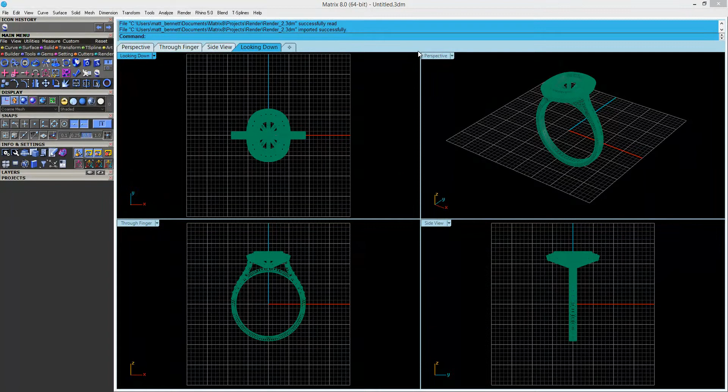Okay, in this video we're going to talk a little about the 3D printing tools in Matrix 8. To start off, we're going to take a look at this file here. It's already been converted into a mesh by our mesh repair utility, and you can find that in another video. But for now, we are going to take this ring and look at it to see where it might need some supports.

So what I'm going to do is open the 3D printing tools, and the very first button here says show support regions. If I click that, you can see in the command line I have the option to add an object. So I'm going to click add object, then click my ring, and press enter, and now you can see the ring turns kind of a gray color.

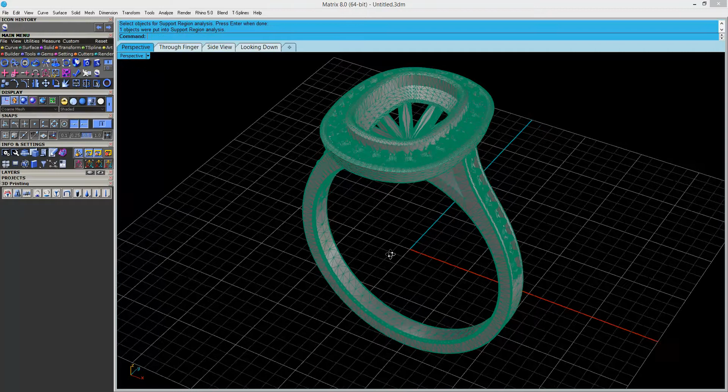So I like to switch over to the machine shade mode just to get rid of all the wires and edges of the mesh. In looking at this, if I flip it and look from underneath, you can see that some areas are marked in red.

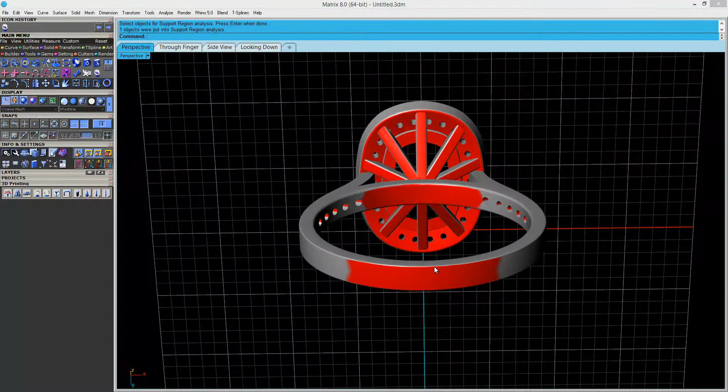Now these are areas that may need supports, okay, and that red area is determined by this degree that you set. So depending on the material and the machine that you're using, this angle may change. 35 works pretty good for most stuff, so we're going to leave it there.

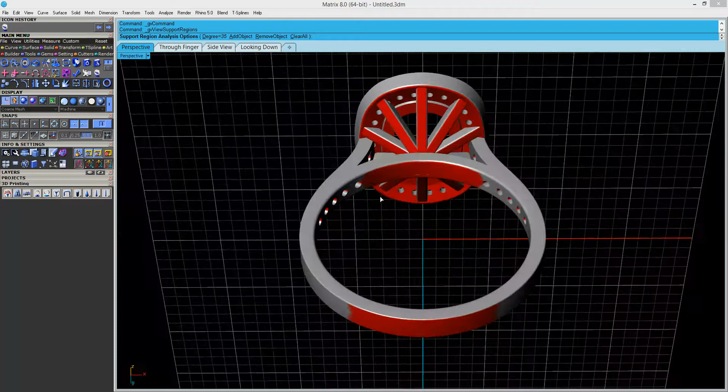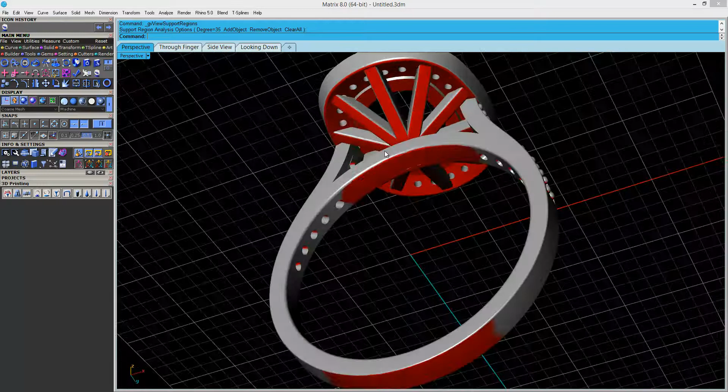So if we take a look at this, you can see all the stuff that is facing downward kind of gets painted with red, and this is just a suggestion. It's not saying you absolutely need support, or maybe the gray areas you absolutely don't need support, but it's just a guideline. So if I look in here, for instance, some of these small areas where it just barely got some of the prongs, you probably don't need support on these areas until you get down in here where you can definitely see there's a lot more red.

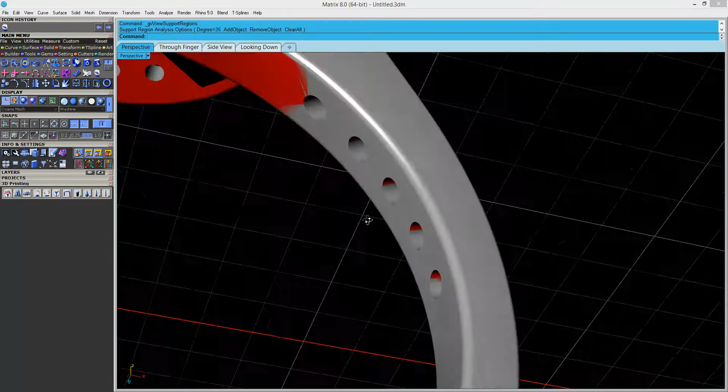Also inside the little holes here, that's probably going to be self-supporting, so we don't need supports there. The areas we're concerned with are really in the bottom of the ring, inside the ring rail here, and then of course these supports underneath the halo and the bottom of the halo itself.

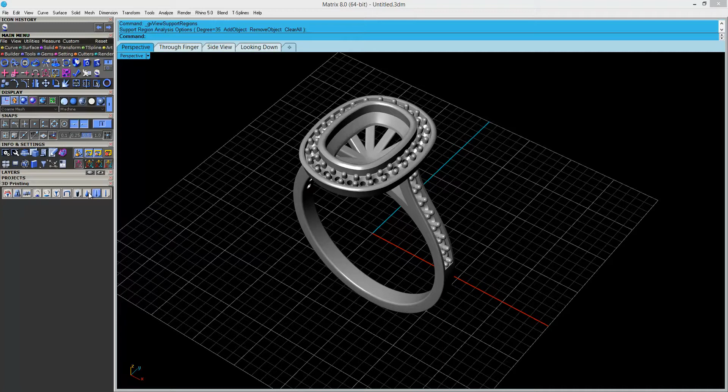Okay, so that's that. So now that I kind of have an idea of where I need to place the supports, I can begin to do so with our support tools, and we have a range of different support defaults and sizes and tapered and all kinds of symmetry action and things like that. So we'll take a look at that now that we kind of know where we need to put the supports.

Okay, now that we've looked at our piece and kind of decided where we need support, we can go over here to the 3D printing tools, and we'll click on the fourth button here. So we're going to move past the text options here and right into ring sprue support. So if I click that, it says select a ring to sprue, so I'll select my ring, and it gives me a little base.

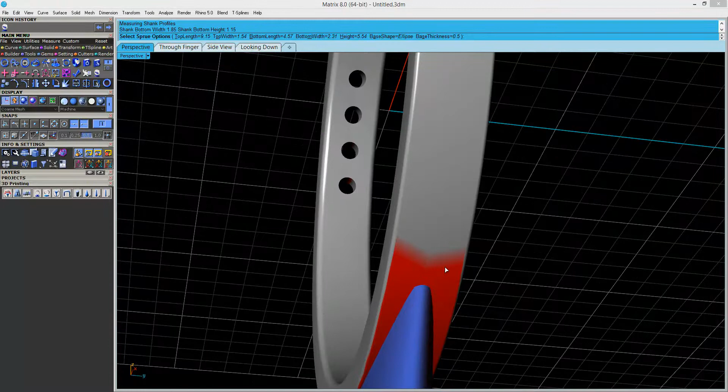So as I'm looking at this, it does a pretty good job figuring out where to put this, but sometimes we might need to make a few adjustments. So you can see this doesn't cover up the red area. That's not really necessary. This does a pretty good job of getting the bulk of it, which is really all I need. So there's some adjustments we can make here in the command line.

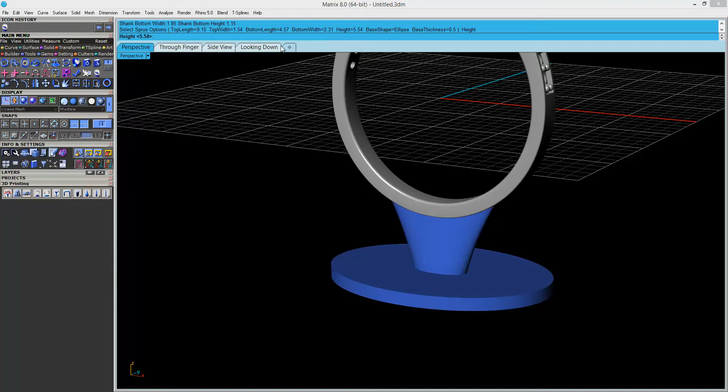So we have top length and width, which is controlling the oval here, kind of the profile of the top, and we have the same thing for the bottom, and then we have the base shape and the height. So if I change the height, we can go ahead and change that. Maybe I'll take that down to like 4.8. You can see that gets a little shorter here. Also at 0.5 millimeter, maybe I want to make that just a tad thicker. I can take it up to 0.6 and my base gets a little bit thicker here on the bottom.

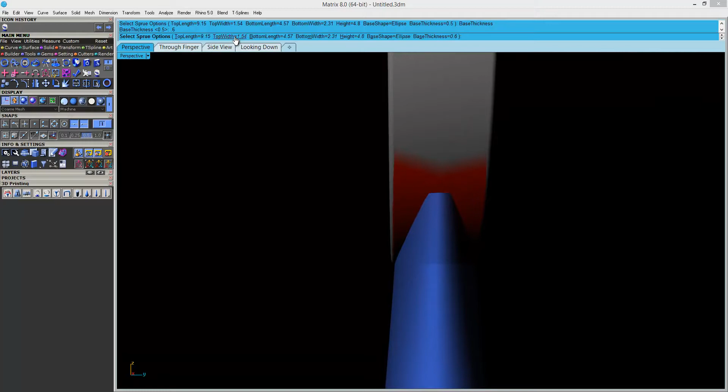So we can change our widths and maybe bring this out towards the edge, or if it's sticking out too far here, we can change the top width, bring it in just slightly to create more of an overhang there.

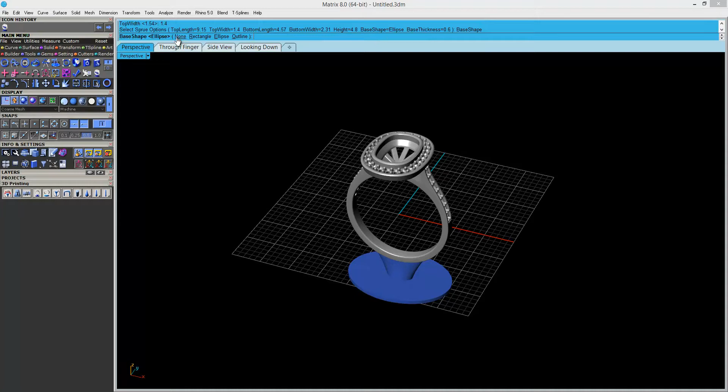So that's something you can dial in and really get just the way you want it. Now, I personally like the oval or the ellipse shape for the base, but we have the option here. If you click on where it says ellipse, you can say none, so that takes the base completely away. The ellipse is what we had. The rectangle just does a simple rectangle.

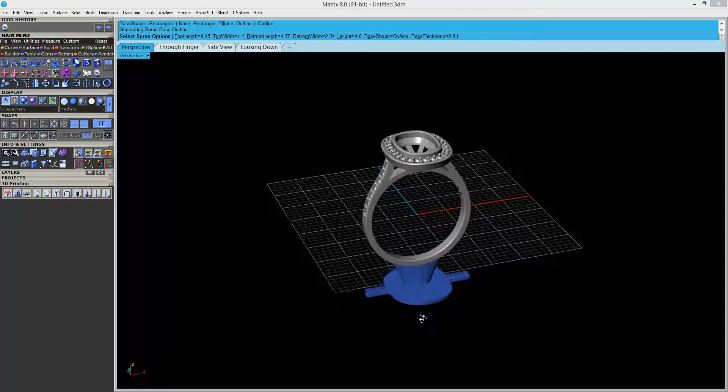And then you also have the option to do an outline, and this takes just a couple seconds to calculate. And what it does is it does kind of a silhouette of the looking down view to create that shape. So that's all well and good.

For me, I tend to like the ellipse. It still allows you to get pretty good nesting and all that good stuff. So okay, that's the sprue and the base. Once we're happy with that, we can just press enter and there's the geometry.

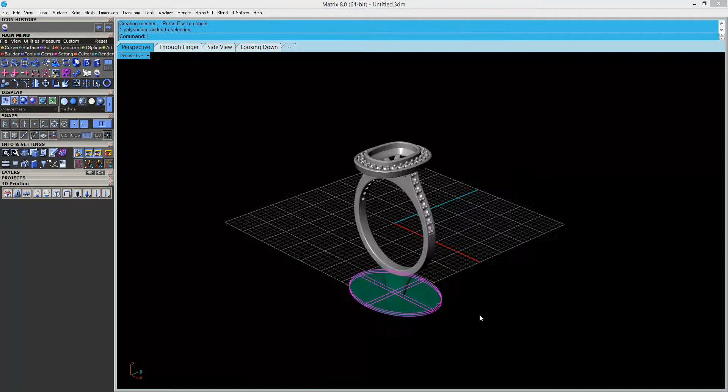Okay, so that is adding a sprue, a ring support sprue. Now the one next to that is just the support base. So if I delete my sprue here and I click on support base, I can click an object and I get just the base without the sprue.

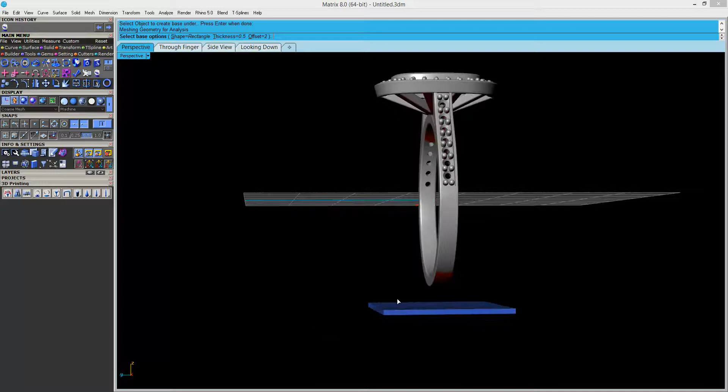Now this is good for certain applications, like if you had prongs going all the way around, or maybe if you had a pendant or something that wasn't a ring and you don't want to have a sprue attached to it there. That base is there, and it has similar options for rectangle, oval, and outline, and then of course the thickness and the offset.

So the offset will just move that closer or further away from the object. All right, so for us, we want to stick with the ring support sprue, and that'll be that. So I'll commit to that, and we'll keep that.

Alright, so in the next part, we'll start supporting the underside of our ring.

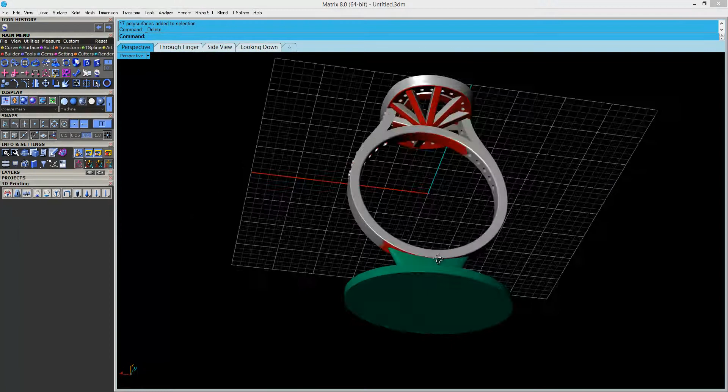Alright, now that we have our sprue base here, we're going to look at how to support some of this under gallery. Now there's a couple different ways we can go about this. I am going to kind of choose, I think, one way, and then we'll take a look at some options here.

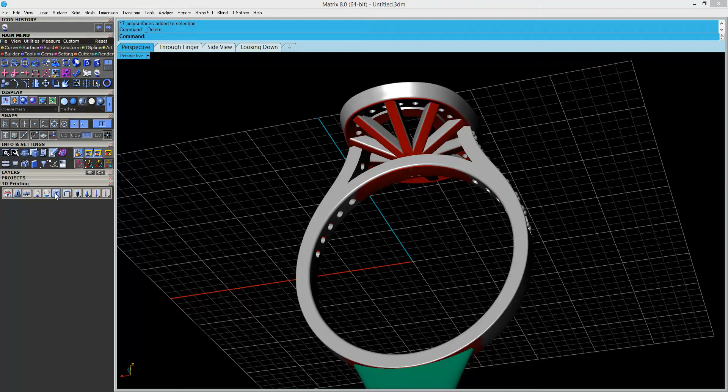So if I look right here in the middle of the menu, we have support ring. It's the one that kind of looks like it has a tree inside the ring. Okay, so we'll click on that. And what that's going to do is it starts out, again, this says support ring, so it is a ring specific tool.

It starts out here inside the ring rail, and you kind of get the base support or kind of an inner sprue, if you will. So I'll take that up about halfway. And then what we get here are branches, I guess you could call them.

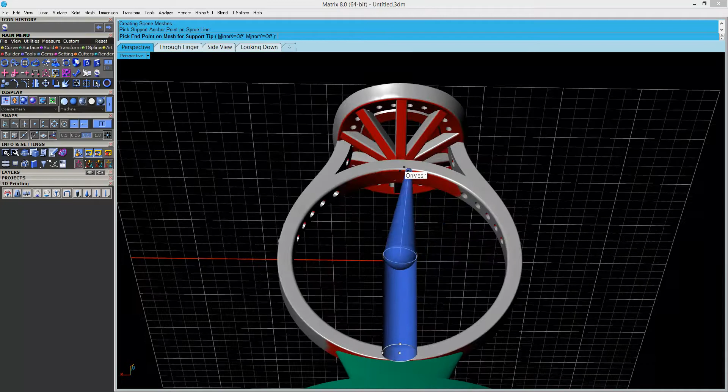So this was the trunk, and now we're going to draw the branches. And you can see that this one tapers. We have some controls. You can see the circles here. That is going to control the diameter. We can set all of this in.

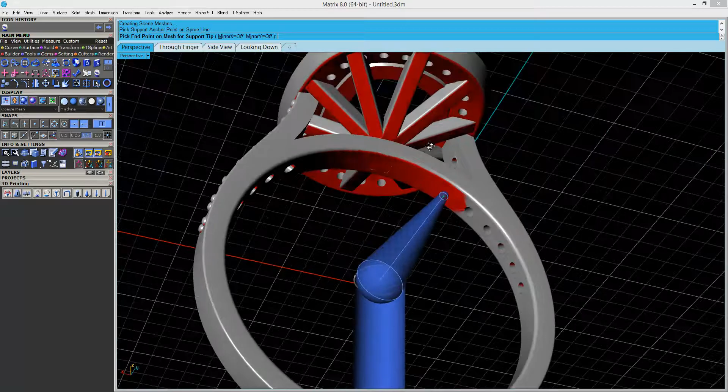We can set all this after we draw the supports. We'll go back and kind of edit some of the size and the angles and whatnot. All right, so with that, I need to support under the ring rail here. Okay, so we'll go ahead and do that.

I'm going to turn on the X symmetry, and that will give me symmetry from kind of the left to the right of the ring. So we'll go ahead and click. I'll click here, here, and then we'll just put one kind of right there in the middle.

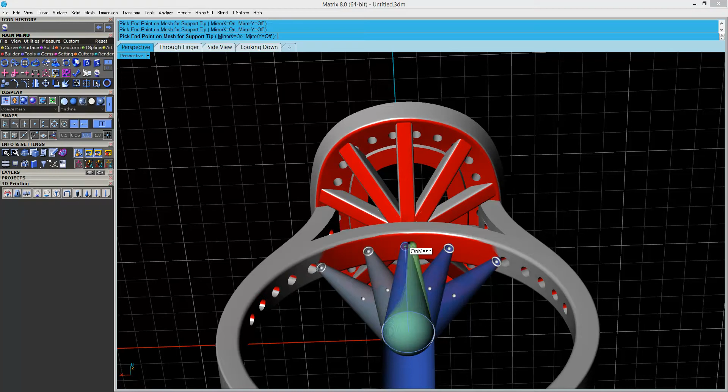Okay. Now I'm going to over-support this ring on purpose just to kind of show you some of the different functionality. So when I go to support up here, I not only want the X symmetry, I'm going to turn the Y symmetry on as well, and that'll give me support on all four sides. Okay, so you can kind of see that.

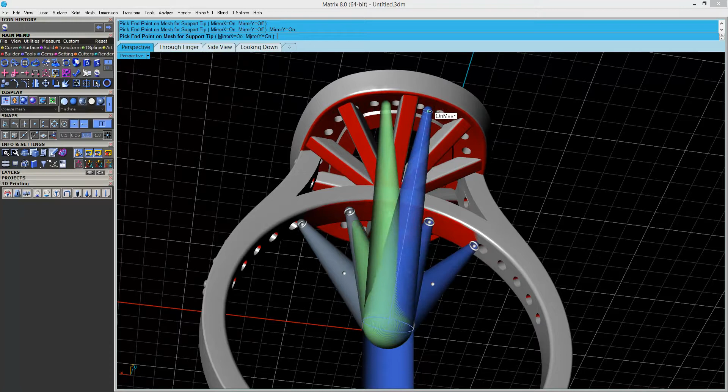Alright, so when we do this, I'm going to over-support this on purpose just to kind of draw some support. I'm just clicking out here, and you can see it's drawing on all four sides. Now when I get here in the middle, I could turn X symmetry off and just do the Y, and that will give me support on both sides.

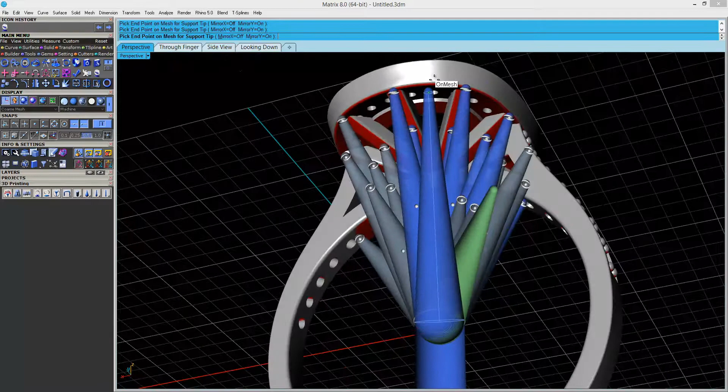Okay, so you could go through and support more of this, but we have more than enough. I mean, again, this is over supported, but I kind of wanted to show you a few things. So we're going to right click and accept that. Now this is not geometry yet; it has not been committed, but what we can now do is grab some of these handles and adjust the angles and whatnot.

So for instance, if I wanted to click here, I could now drag this down or up and change the angle. So we can go ahead and do that. I can change the size by clicking the circle and dragging inward, or I can type in a diameter if I'd like to do that.

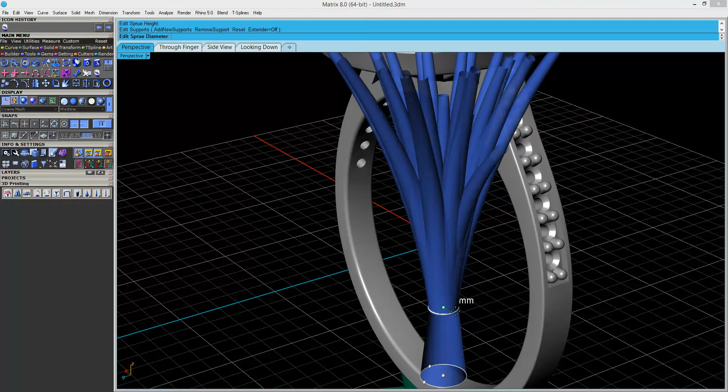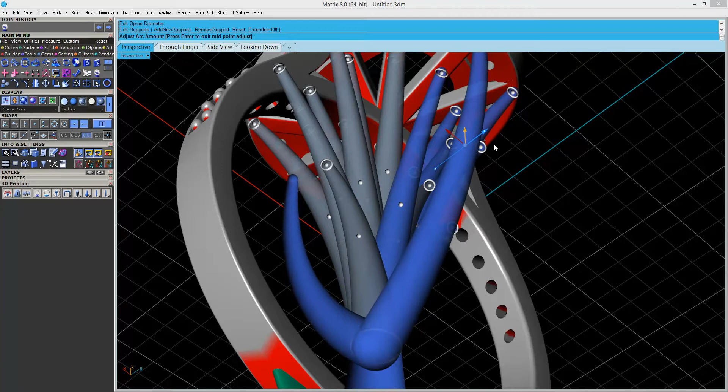Okay, and you can see how everything just kind of follows along. Now, these dark blue ones are the kind of parent objects, if you will. So if I adjust one of these, you can see by clicking that ball I can change the angle. You can see it adjusts the other side as well. So I'll pull that out and kind of adjust that to bow out away from the ring a bit more.

And then I'll click on the next one that's inside here, and I'll kind of do the same thing with that. So that ensures that it's not going to intersect the ring.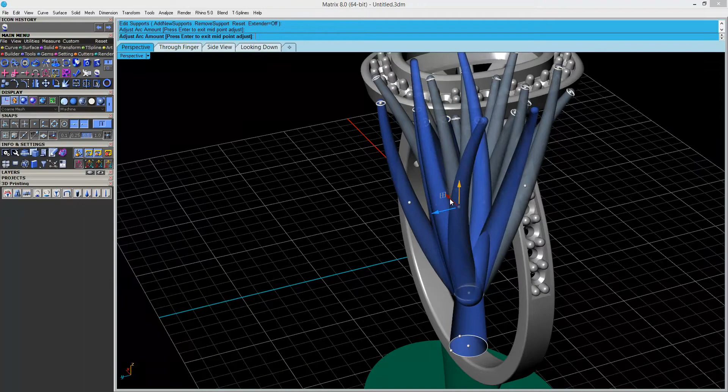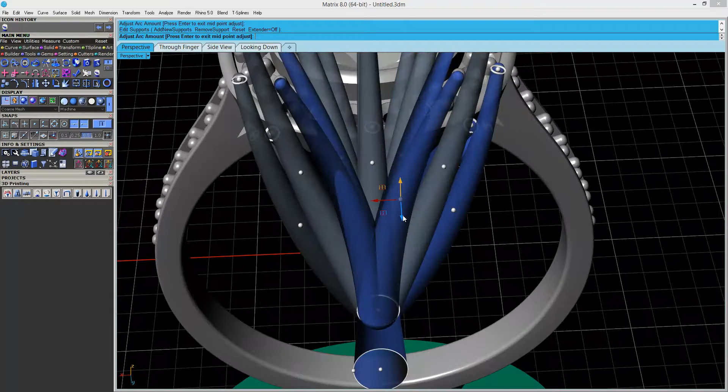Okay, and we'll take this and we'll bend that out and away from the ring as well. And then we have that one we already did. We have this one back here. Okay, and we'll go ahead and adjust that one as well.

Okay, so after we're done, we can reposition these by clicking and repositioning or changing the diameter. All that is adjustable, and once we're done we'll go ahead and hit enter, and you can see that gives us our supports. Now again, this is over supported. I just kind of wanted to draw a bunch out there so you could see what it looks like.

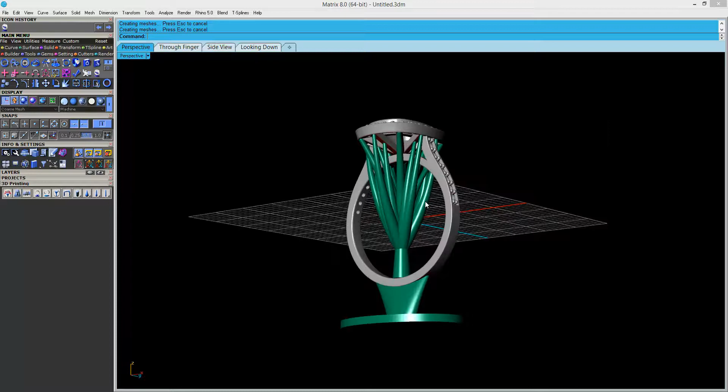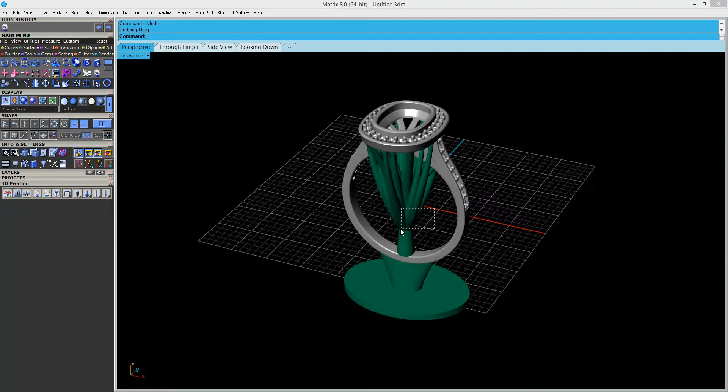Alright, so that's that tool, and we can then run this again through our mesh repair tool and get it worked out. So there's that, and the next thing we're going to do is take a look at maybe a slightly different way of supporting this. So I'm going to go ahead and delete these, and we'll dive into the next tool.

Okay, so we looked at one way to support the underside here, and well, I got a little carried away with support. So let's take a look at another option. We have a few support options here to the right. They're all similar, but really they're different presets. So I'm going to look at one of these. We have large, we have medium, and we have small.

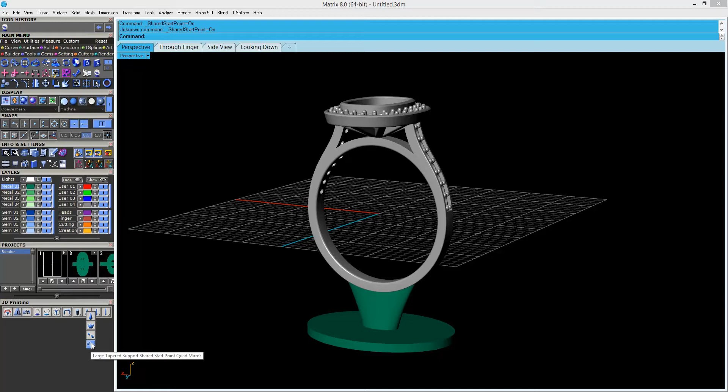And I'm sorry, large, medium, and then just supports. This would be the smaller one. Now, these are all kind of the same tool, just with different presets. So I'm going to work with the large tapered supports, just so it's a little easier to see. Okay, so if I click on this, I get a little drop down, and we have a single support. We have a few options here. I actually want the one at the very bottom with the quad mirror, which will be an X and Y symmetry.

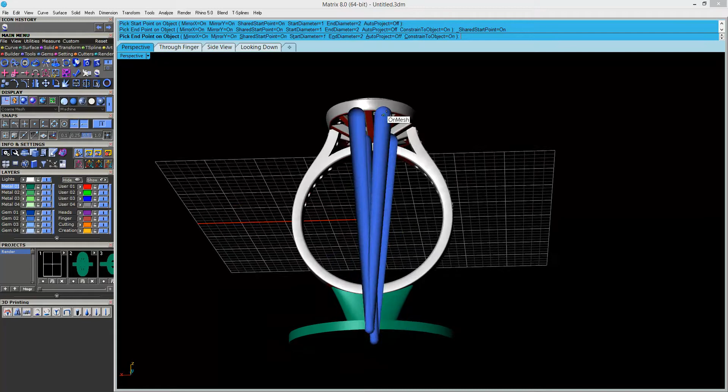Okay, so I'll click on that, and we have a couple options in the command line. So the ones I want to point out are the shared start point and the auto project. Shared start point will allow me to start from the same point, let's say here, and reach up to the object here. And you can see my tapers kind of going in the reverse direction. We could change that by simply changing our numbers in the command line here. So you can see that I could support this by simply clicking here and here, and then maybe we do another one here.

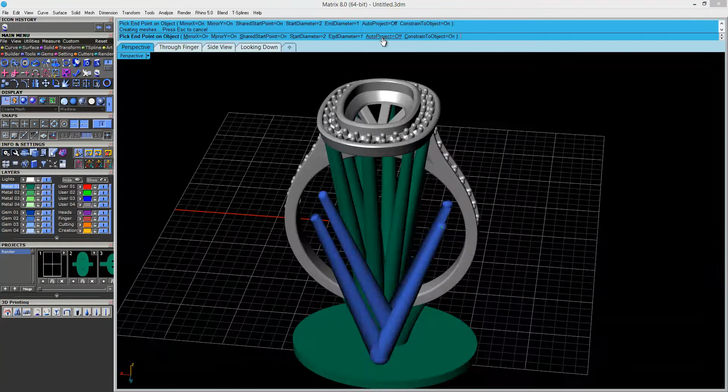The shared start point keeps the supports coming from one central location, so they all start in the same place and then branch out.

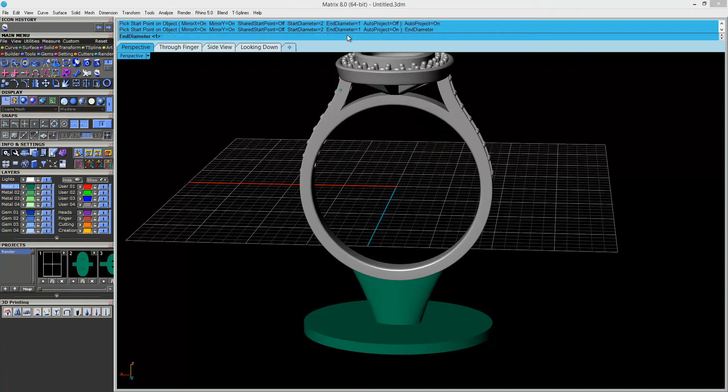If we go back to that tool, I'm going to switch these back the correct way, so we have start and end. I'm going to turn shared start point off and auto project on. So wherever I click, it will project it to the base we've created here. Again, I have my X and Y symmetry on.

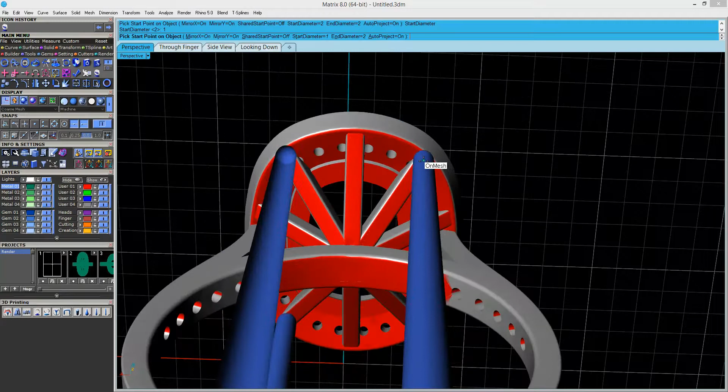These supports are a little large, but I'm keeping them big so we can see them a little easier. So I could click here, and then maybe we click here, and then here.

Now, this may be a better solution. It's less that goes into the finger rail, not like the ones we had that looked like a tree on the last one. So this may be a better solution. You could break these supports away.

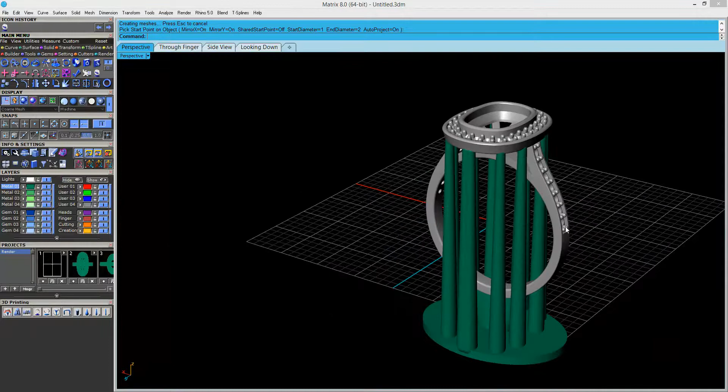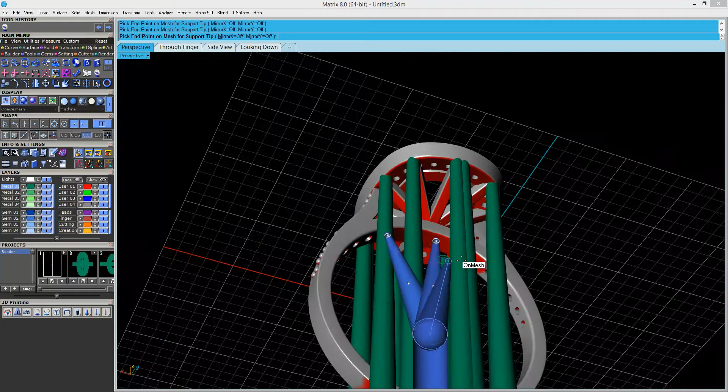Again, these are a little heavy, but I just wanted to show the tool. So we could do something like that, a combination of this and our ring support here. We could still do our ring support and go inside the finger rail and click, click, and click.

Oop, and I snapped to something bad. Here we go. All right, so we could still do that. That's all well and good. So you can use these tools together to really get good supports.

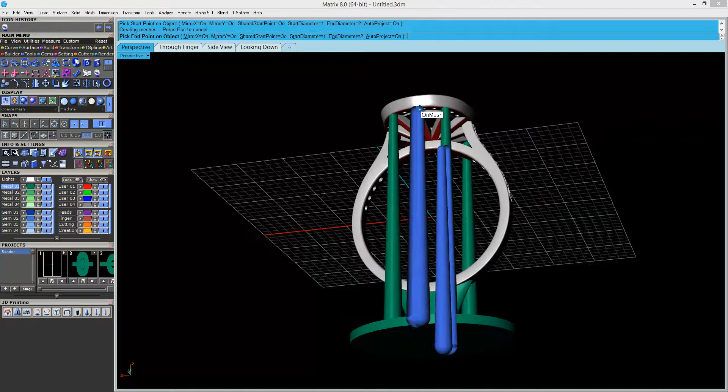Now, the one note to make when you are using these: if you have the auto project option turned on and the shared start point option turned on, it will ignore the shared start point, because no matter what, it will project to the base. So if you have both of those turned on, it will ignore the shared start point. All right, so there's that tool, and again, these are the same, just presets at different sizes.

All right, so in the next part, we're going to take a look at one more support tool, and then some other options.

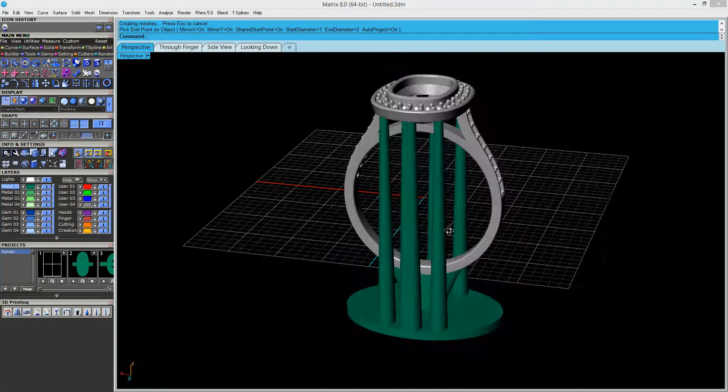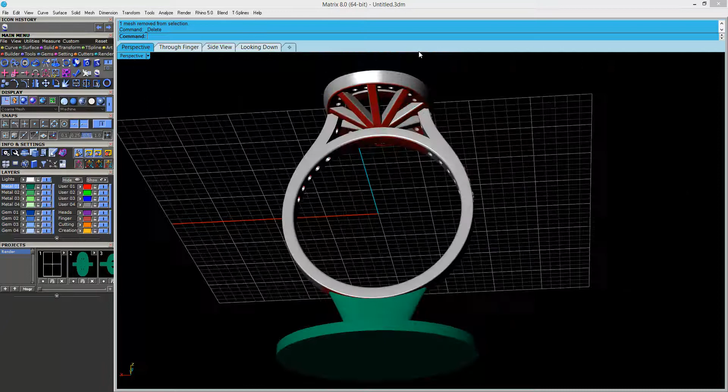All right, so we've talked about the supports and things, and I deleted it so it's a little easier to look at here. I'm done with the analyze display mode with the red and the gray. So to get out of that, I click and open my support tools again, click show support regions, there is a remove object. I click that, click my ring, and press enter, and that gets me back to my regular shaded mode.

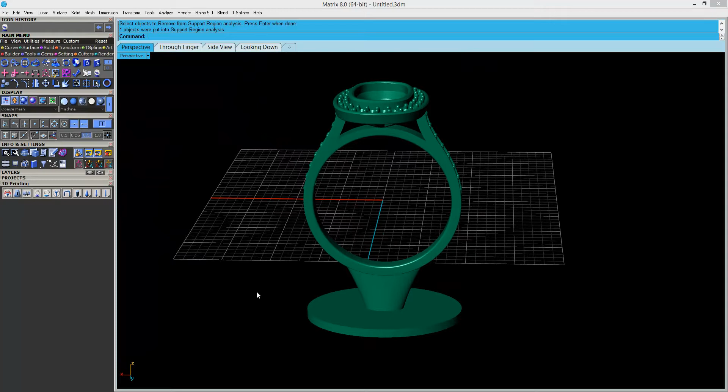Okay, so from here, I want to do a couple other things, and we'll assume I have all my supports made and everything is good. The next thing I want to do is assign a job number, or we could do a name, a center stone size, finger size, or whatever it is we want. But for us, we're just going to pretend it's a job number.

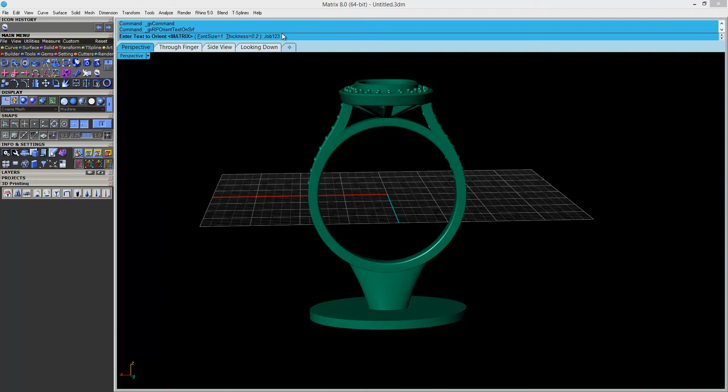So to do that, we have a couple different options. The first one here is orient text on surface, the second button over. If I click that, it says enter text to orient. So we're going to say job 123. I just typed that right in the command line. I press enter, and it says surface to orient on.

So if I click this surface, you can see it comes in kind of sideways. Now, we don't really know how you made your surface, so there's not really a good way to get this right 100% of the time. So if it comes in sideways, upside down, or something like that, all you've got to do is go up here to rotate.

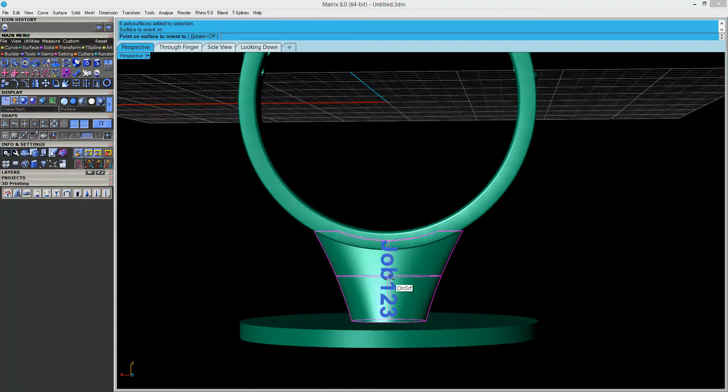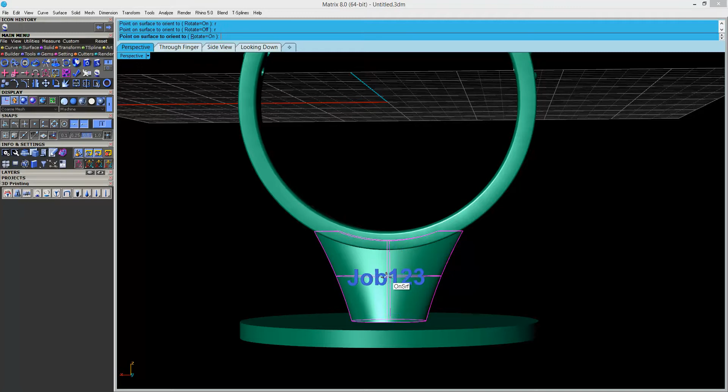If you click this, you can see it rotates 90 degrees. If we click it again, it'll rotate 90 degrees again. Another option is to type R, so you can see R is in the command line, and right click. R, right click, R, right click. That'll rotate it as well. You get it lined up the way you want, and you simply click, and that drops that text onto that surface. You can see it's a positive.

Okay, so there that is. And then with this one, it's a little longer, so we may need to do some scaling to make sure it all intersects, but that's all well and good.

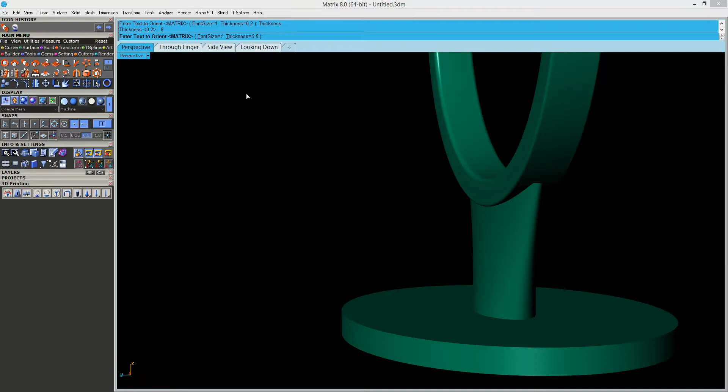All right, so if we run that command again, you can see you have a font size and a thickness. So I scaled mine, but we can definitely fix that if we know it's going to be too thin. So we can change this. Maybe we'll change this to 0.8, and we'll type job 123 again, and click our surface.

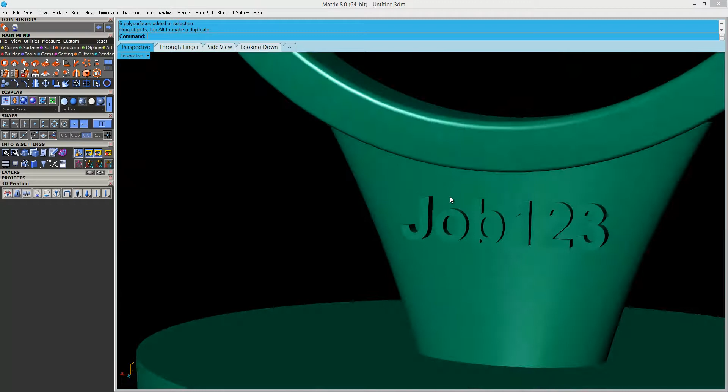I'm going to say R enter, R enter, R enter, and get it rotated around, and we'll simply drop that text in, and it intersects. We could always move this in if it sticks out too far. So there that is, and that doesn't stick out far enough that it should need support. It should be good just how it is.

So I put that on the sprue. You could stick that on any surface. So if you have like an interior surface or something you want to put that on, that's fine. But it does work really nice here on the little bases.

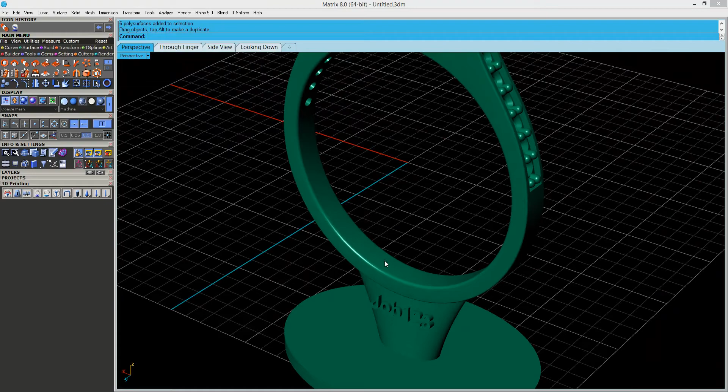So, the other option is to put text on the inside of the finger rail. The finger rail text is here, so it says finger rail text. It requires a ring rail. So I'm going to get out of machine mode and go back to shaded. I don't have a ring rail yet, so let me go ahead and load that in.

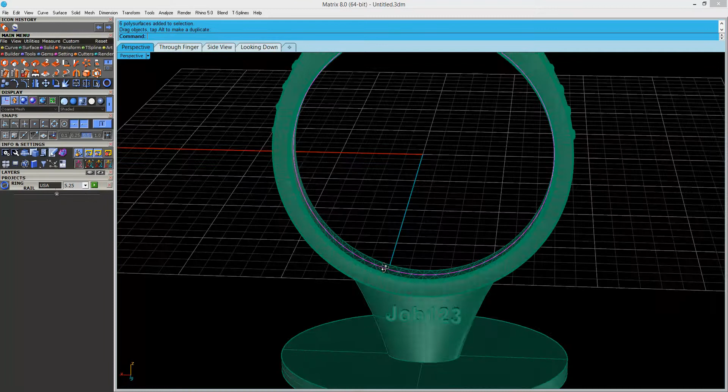I know this ring's a 5 1/4, so I'll go ahead and drop that ring rail in. Now, with the support tools, if I click on ring rail text, it has the same thickness, font size, things like that, and it has how many degrees the text will span. So we have a lot of options here.

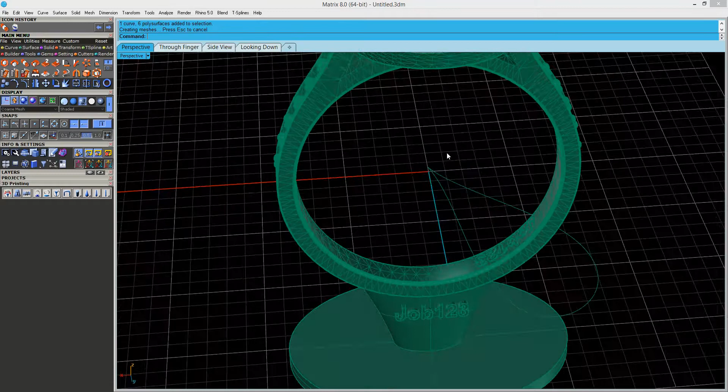Let's go ahead and type in job 123. And we'll do that. Now you can see it draws a little curve, does its business, and it drops it down. So let's assume we want that in a different location.

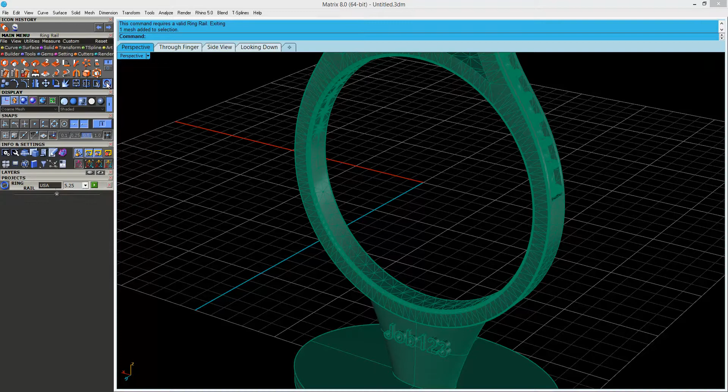Alright, so I'll delete that, and we'll say ring rail text. We must have lost our ring rail here, so let me go ahead and drop in another one. I think I probably deleted it when I deleted the text. So there that is. And then we'll go to our 3D printing tools and ring rail text.

Now this time I'm going to make it a little thicker, so we'll go to 0.5. And the placement start angle was at 220. Let's make this maybe 120, should put it somewhere over here. So let's say 120. And we'll press enter, so you can see that brings it over here to this side. Okay.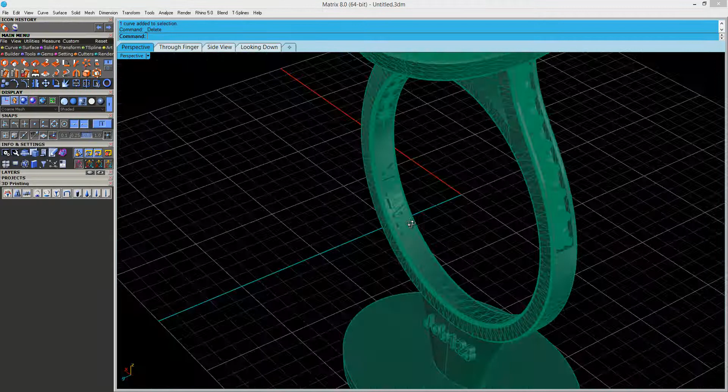Alright, so there that is, and we're ready to go. So that's two ways to get the job number, and I didn't type my text, it just defaulted to matrix. So there's that. So that's how to add text, some sort of identifier to your job before it goes on the machine. And again, we could swipe all this and take it to our mesh repair utility and just unify it all one more time for good measure.

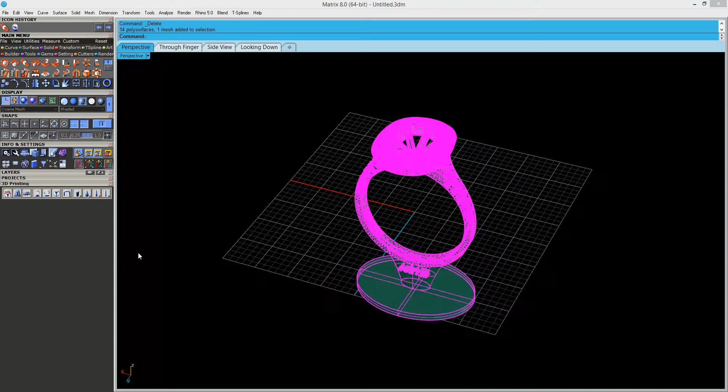Alright, so here we are. I have a slightly different model now, and this one poses some unique challenges. So let's take a look at it. Right now, it's just in our default shaded mode. You can see it's a mesh. It's all been unified and all that good stuff.

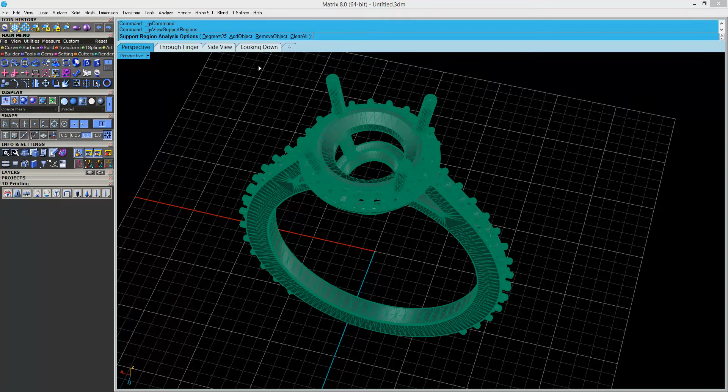Let's go ahead and do our show support regions. Alright, so I'll do add object, and there's my object. I'll switch over to machine mode, that's a little easier to see. So you can see all the red areas. So we could go through and put our base and our supports and all that. For this one, I am going to make a little base, but I'm going to leave the supports for the inside of the ring rail out for now, just so it's a little easier to see everything.

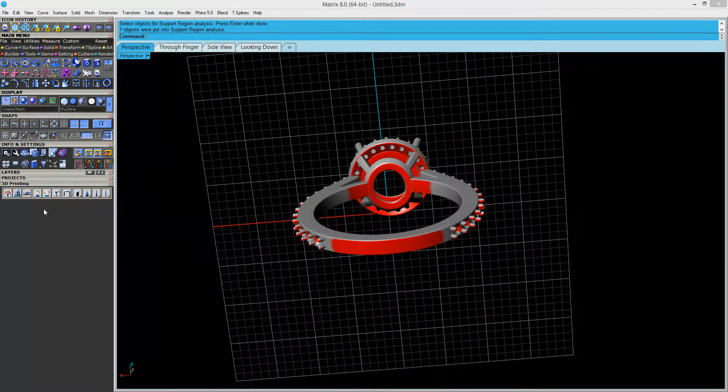So let's go ahead and make this base. Select the ring. And there that is. So that's all well and good. I'm happy with that. We'll just leave it as is.

Alright, so there that is. Okay, so let's take a look at these prongs. That's really what I want to focus on.

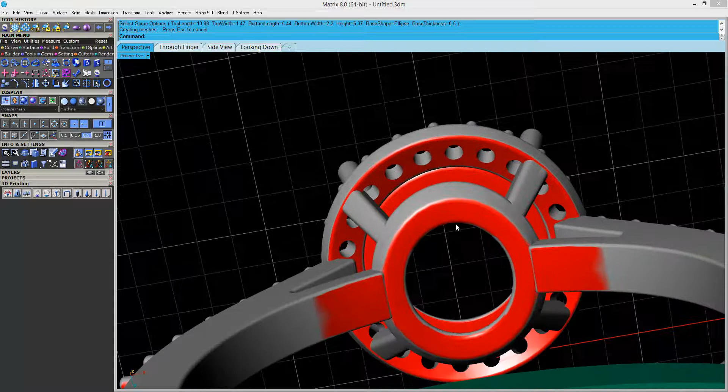This stuff up here is pretty straightforward. We could put a couple supports here and on the ring, and then of course the upper halo here. But these are always a challenge.

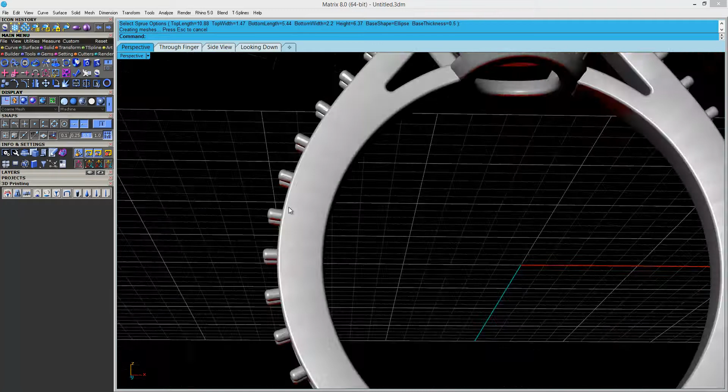These are the down-facing prongs. Now, as you get up here above the kind of 3 and 9 o'clock positions on the ring, even though these have red, they're pointed slightly upward, and that tells me we'll be okay. So we're really only concerned with maybe this set and then down.

Alright, so how do we take care of that? Well, we have a tool called blend supports. Now what this allows you to do is click on one point and then another point, and it will do kind of an arc between those two points.

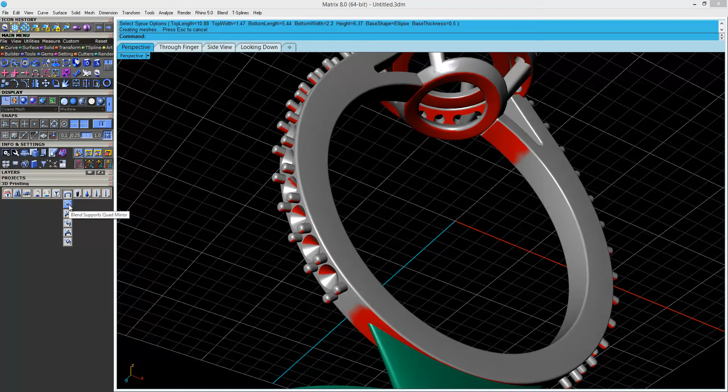Alright, so let's go ahead and click on that, and you can see we have some symmetry options. So we'll go ahead and click on the first one, that is the quad mirror, because this ring is symmetrical in both the X and Y axis. So go ahead and click that.

We have some start points and end points, so I'll go ahead and click a start point, and you can see I have some adjustments for what's called the arm length, the blend tension, and of course the diameters.

So I'm going to go up on the diameter just a little bit, so we'll go up to maybe 0.4 for the start and the end. And then the arm length and blend tension, the purpose of those really is to create separation from the model.

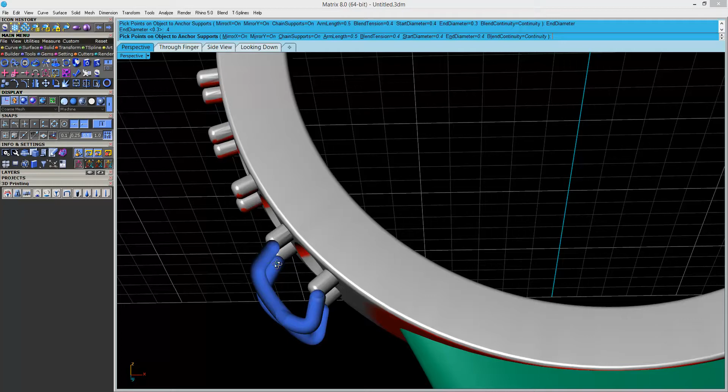Now I'm going to leave it with the default, but let's just take a look at it for a second. If I wanted this to blend out further away from the ring, I could increase the arm length or decrease the tension. If I wanted it to pull in closer, I could probably just decrease the arm length or increase the tension. So for now, we're going to leave it as is.

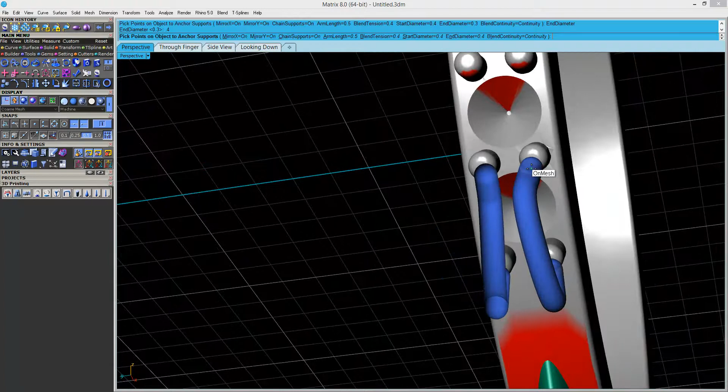Now you can go straight up from one prong to another and do both sides at the same time. But what's a lot of fun is if you crisscross them here, it creates a pretty neat looking structure. So we'll go ahead and do that, and I'm just going to go up, going from one side to the other. And I went up right to the ones, like I said, I'm just worried about these.

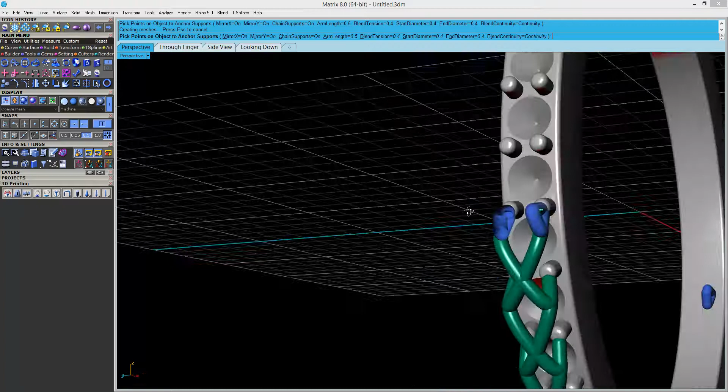We could go up another set. These are kind of facing straight out, but I'm just going to leave that as is. Alright, so there that is. We kind of jumped from one prong to another. And now we have these kind of elbows that are hanging down here.

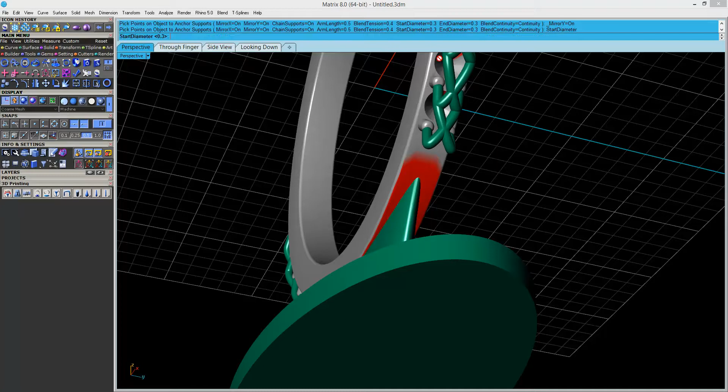We can use the same tool. So I'll just right click, and I'm going to click on this point, and we're going to go up just a little on our diameter. So we're going to go start diameter 0.5 this time, end diameter 0.5, and you can see we have the quad symmetry. So we'll just go down.

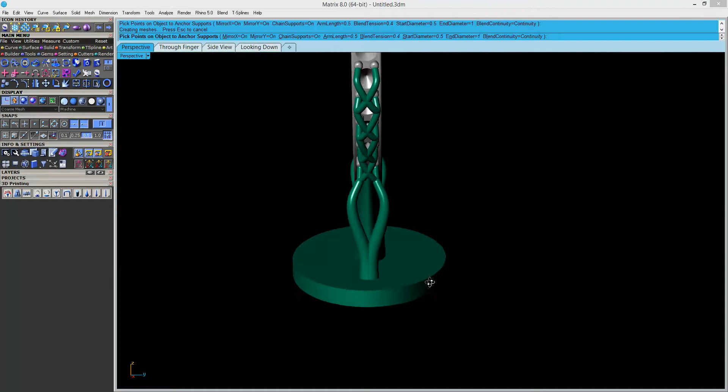You know what? We'll go up even higher on our end diameter. Maybe we'll go to 1 for that, and we'll just bring those right together, just like that. Alright, so we can say that that should grow. We can go in and add more stick supports if we want, or we could even come off of one of these. But I think we'll be good.

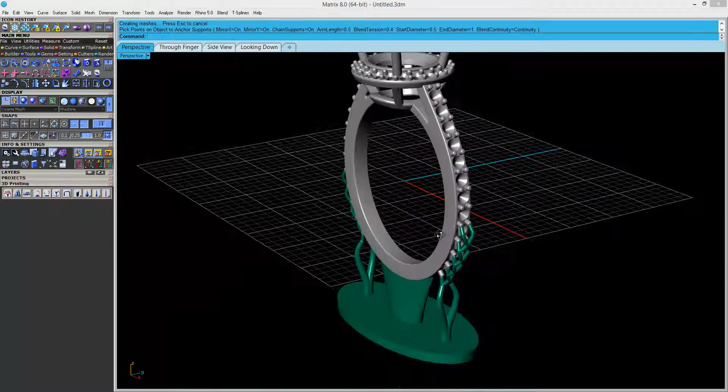So that's a good way to do these down-facing prongs. You can also use it to support in between gallery rails here and things like that. But that's not bad. So if we add the supports to the inside, we should be good to go. Yeah.